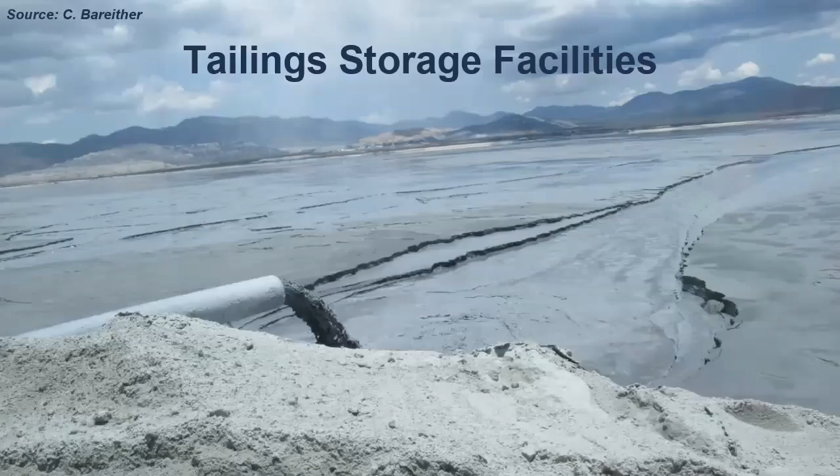As much of the water as can be is going to be recovered from a decant pond, and the mine will go on, right? And the problem with these facilities is that if they work, great, we don't worry about them. And if they don't work, we have tremendous problems. And so this figure that I like, that I've modified from Carlos Santamarina, shows a few of these examples of why we can have problems.

We can have overtopping of the dam if water is not correctly managed or balanced, or if the climate does not do what we expect it to do. We can have a geotechnical failure in the dam. What I'm showing here is what's called an upstream raise, which is the most efficient, the lowest cost, the lowest footprint, but also the least stable in many conditions.

Or we can have a foundational failure where foundation material either doesn't act as we expected it to, or there are pockets of material that are heterogeneous, that we didn't characterize the engineering properties at that location because things varied in space and we missed it, and where we get behavior that we didn't want. And the result can be videos of failures that get splashed across social media, right?

So has everyone seen this video? A few nos, so I'll go through the very beginning. So, right, this is a tailings dam failing under static liquefaction. Rock on the face. There's a truck and people working on that. Yep. Yeah. In real time.

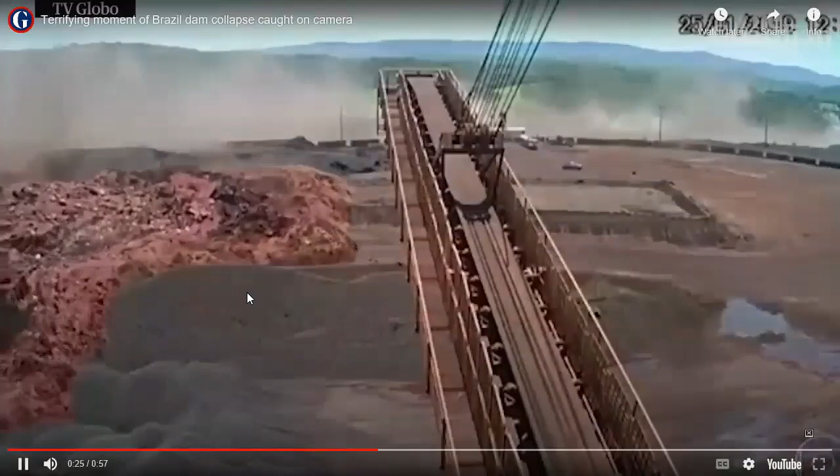And a little bit of a better sense of scale. This is a few years ago. Oh, maybe I'll jump to the end. How about this one from a few weeks ago? Right in South Africa.

So these failures continue to happen, right? And we're going to talk about that a little bit further. The result of this, as well as increased pressure on the mining industry to be more green, right? And to have different styles, perhaps, of interaction with communities, different engagement with communities, different engagement with the public, has been the global industry standard on tailings management that ICMM member companies have agreed to implement in some framework.

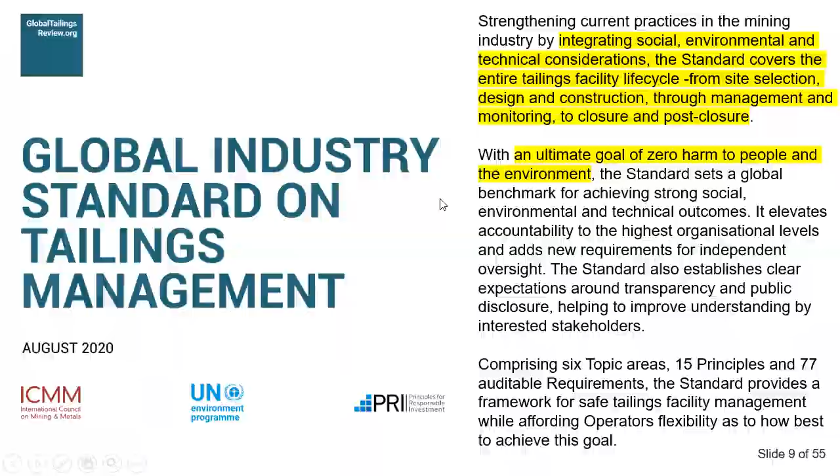The goal of this is to go from the very beginning of mine planning all the way to after the mine is done, after the tailings are covered, after a landform is reestablished. The other goal in here is to have zero harm for people and the environment. So the goal is zero harm. A question exists whether or not we can get there, but a huge focus in the tailings space right now is how do we get there? And part of that is investments, part of that is awareness, part of that is additional technologies.

So I'm going to talk today about two aspects of towards zero harm. One is going to be related to design and implementation, and partially related to activities going on at mines, where we need good engineers and we need communication between those that are designing or managing tailings and everyone else involved in the mine. And we need to be doing better at that than we have in the past.

The other piece is going to be briefly around technological innovation as an example of some research we've been doing at Colorado State with some industry partners. One example, there are many examples. And again, my goal in trying to cover both is to not totally bore you. So we're going to talk first about design and implementation and talk very briefly about static liquefaction, which is the attributing mechanism to a number of the recent failures. But it's not a new failure mechanism, right?

So if we go back, Priscilla was leading a short course earlier this last week, where we went through a case study on a tailings dam failure that occurred in South Africa in 1994. Now, 2 orders of magnitude smaller than Samarco. 2 orders of magnitude is a lot smaller, but these failures continue to happen. So we can't say we didn't know this possibility exists when it's been happening for decades. And it goes even further back.

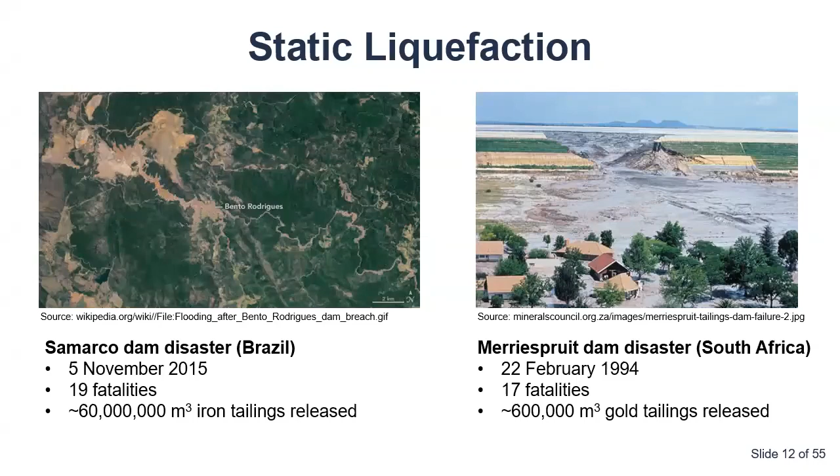If we go back to Montana, so I'm from Montana. I graduated from high school right around here. If you look at the largest reservoir in the state, the Fort Peck Reservoir, during the dam construction in 1938 it failed via static liquefaction and was identified to have failed as static liquefaction, although at that time the concept was new and very controversial. And so there was some good technical fighting in the geotechnical literature about what the cause was. But we've been aware that this exists for going on 80 years.

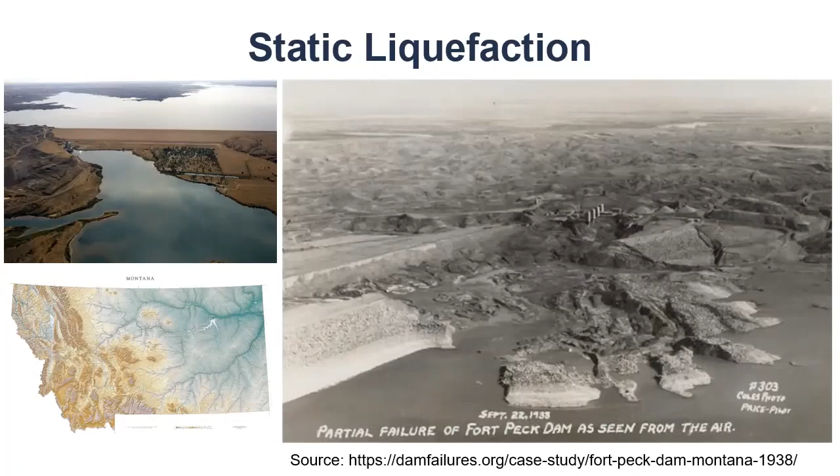Right? So why does it keep happening if we have awareness that things can fail this way and they will fail this way under certain sets of conditions? All of this comes back to effective stress. So I was teaching undergraduate soil mechanics for a colleague who was out of town earlier this week. I got to introduce effective stress, which is my favorite concept in geotechnical engineering, the seminal contribution of Karl Terzaghi to soil mechanics.

My dog is named after the engineer that first published this equation. My cat is named after his lab assistant. My wife would not let us name our son after him, but the dog had already been named. I think I lost that battle.

But who's familiar with effective stress? To varying degrees. So the concept here is that soils and tailings or any saturated material, the stress felt by the material is related to 2 components. It's related to the total stress applied and to the pore water pressure. So the total stress is just the composite normal stress on a plane. It's a combination of the soil stress, any loads at the ground surface, and the weight of the water.

One way to think about it would be if you took any plane in the subsurface and just took that column of material out perfectly and stuck it on a balance and weighed it, and then divided that by the area, you would have the total stress that was acting on that plane. And it gets a little bit more complex if we're looking at different orientations in the subsurface, et cetera, but a pretty basic stress. The pore water pressure is exactly what it sounds like. It's the water pressure in the pores.

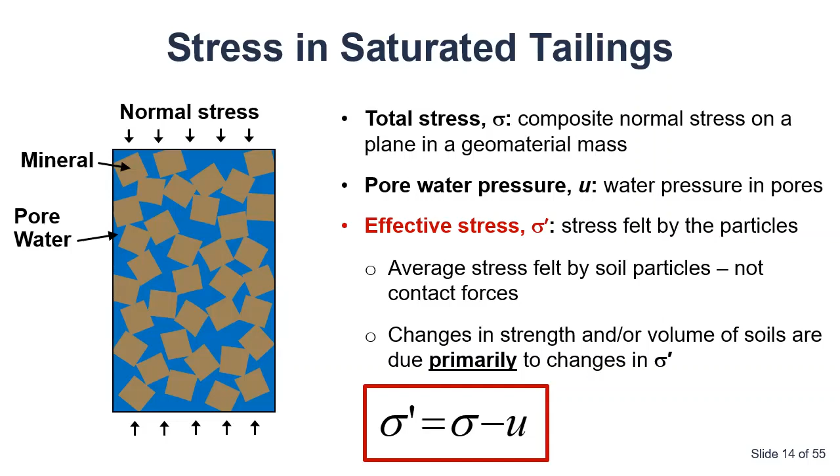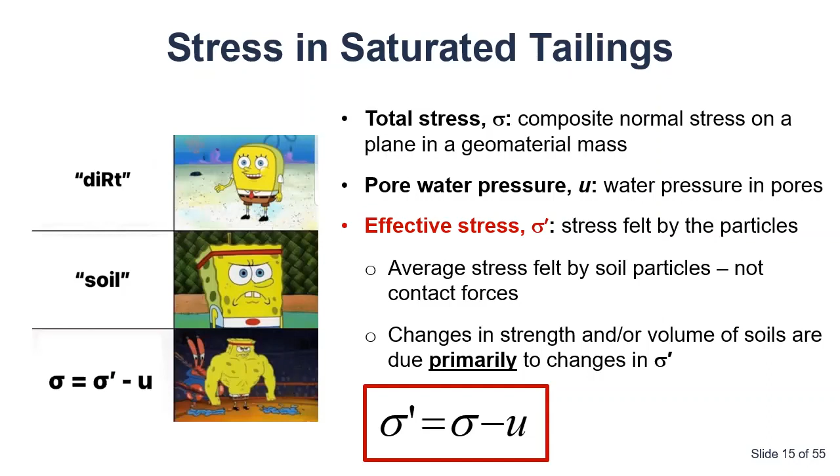It's certainly more complex, but this is a very fundamental concept in geotechnical engineering. At the end of the semester, I make my students make memes to describe the class. I often get a third of those just related to effective stress and the importance of effective stress in geotechnical engineering. And effective stress is our tailings challenge. But we've known about this and we teach it to undergrads. So why do these fail?

Part of the answer is in this upstream construction. If we don't know what exactly was placed here because we didn't communicate it, because we weren't paying attention in the past, because somebody was having a bad Friday and didn't document the deposition or the location of the slimes of the pool next to the dam on that Friday, over the 20-year period that this dam was constructed, and then later on construction happens above it, we can run into problems.

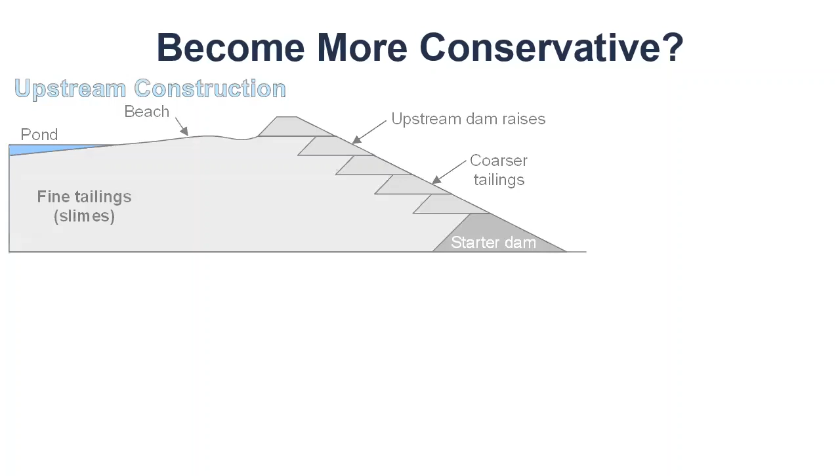So one solution to dealing with this then is we become more conservative and we no longer build on top of those potentially weak materials. We build straight up, or we build downstream even to get things even stronger. The problem here is it requires more material to actually build the dam, and it takes up a larger footprint in locations where often we're space limited.

So we've got challenges. Characterizing these old facilities and figuring out where those weak spots are is a challenge. We can do it. It just takes a lot of effort. But to the point earlier on the video, there was a drill rig out at the toe of that dam when it failed. So there's a lot of these facilities and there's a lot of haste needed to get these characterized to make sure that we're not going to run into more problems.

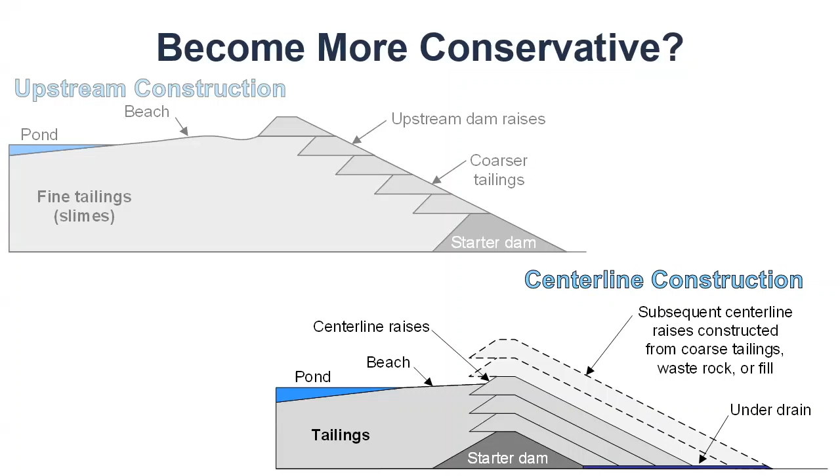Yes. But it's also predicated on maintenance and water management practices. Yep. Both of which were grossly inadequate, and are likely inadequate at a number of facilities of the at least 17,000 that exist across the globe. There's estimates of these number of facilities up to 34 and even 40,000 tailings facilities worldwide. It's hard to actually get estimates.

This is from a student's work a few years ago, and you see there's plenty of countries where we know mining is happening that the estimate is zero because there's not reports on the number of tailings facilities. There's also countries where we have good databases as to the number of facilities that are in operation. The result of this, though, is you've got big complex facilities with sometimes unknown history, and there's a lot of work to be done to assess whether or not all of these are stable given our current set of knowledge and that we're not going to continue to have problems.

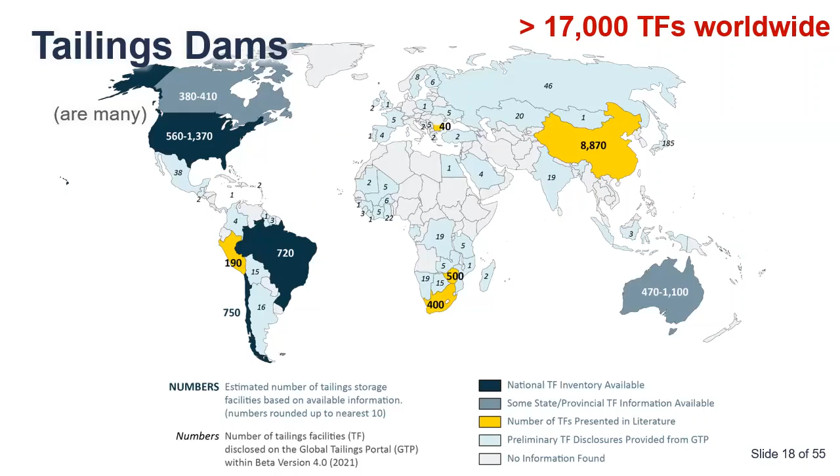All while we're trying to ideally mine more with lower grade ores. And so we're going to have more projects coming online simultaneous to assessing existing facilities. So part of the Towards Zero Harm is just having good engineers that are out there assessing this. This good engineer would also come into those ethical questions and whether or not we have governance in place that is able to frame those ethical questions and impact some of those ethical decisions, but also that companies are buying into that and realizing that there's a huge risk at play here and that some of those schemes that are either ethically questionable or unethical really are not acceptable and really need to not be at play.

So one of the issues in play, and certainly a fun one to talk to at a university, is that we need more tailings engineers. We also need more mining engineers. And so we don't just have one problem here, but especially with these recent failures, especially with increasing size of facilities, and especially with the GISTM and all of the assessment that has to be done as part of that, we have a large need for more skilled folks to work on this.

The other problem, and I actually don't know if this exists in the mining industry, it exists in other portions of civil engineering, we have a lot of baby boomers with a ton of knowledge. We have a big drop off after the baby boomer generation. And because of that, we need a lot of people, but it's not just like the university is magically producing competent, fully trained 20-year of experience engineers. It's going to be a long journey to get there.

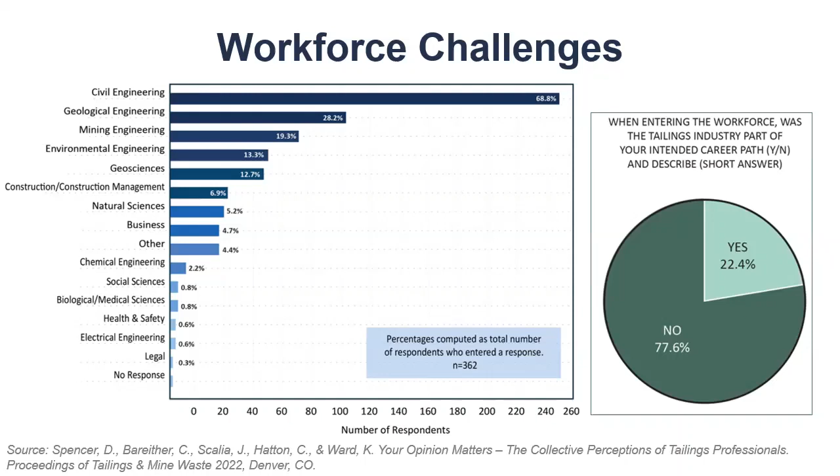And I would argue increasingly, the huge piece of this needs to be communication among all these, and especially communication with the mining engineers, because a lot of the decisions that the mining engineers, that the metallurgists are making are impacting the tailings, are going to be impacting the tailings, have impacted the tailings. And so those communication lines need to be much more open and more developed than maybe they have been in the past.

We asked those practitioners, what is the greatest challenge facing the tailings and mine waste industry? Their opinion was the biggest challenge is labor. And primarily, these were short answers. That labor is having good people, getting good people, retaining good people. Management in general, social license, design safety, mining industry practices, probably all things that if you asked anyone in mining, you would get similar responses.

So what are we doing about this if we know there's a labor problem? CSU has been working on tailings and mine waste work since decades ago. Started the Uranium Mill Tailings Conference with John Nelson and Steve Abt and others in 1978. That conference is still going on. It'll be hosted in 9 days in Denver. We've got 650 registrants. It's sold out. We've maxed out the venue.

So there's activity here. The horrifying thing, we have 650 registrants. Of them, 30 are students. And there's about 10 to 15 academics. So that partially reflects that we've got a conversation that happens among industry. It's also a reflection that we need to be doing a lot more in recruiting and students. We need to be a lot broader.

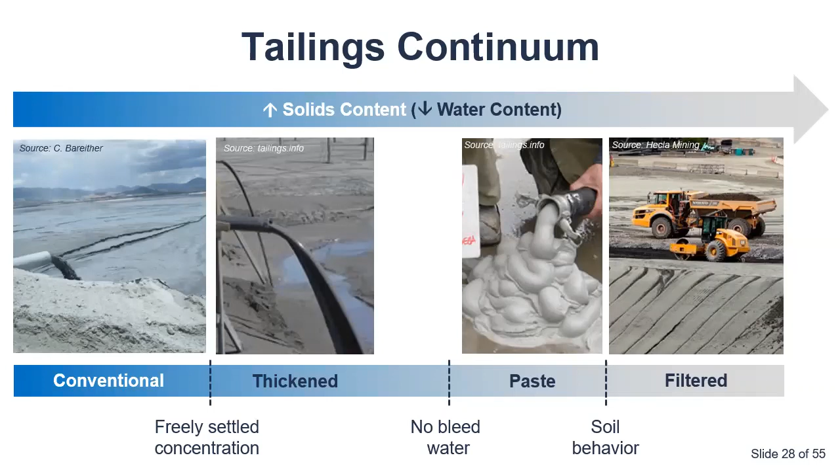And to the right on the spectrum is filter tailings or filter cake, where we've gotten the material to be unsaturated. We have something that's acting much more like soil in theory, and less like the muck on the bottom of the pond that you punch through immediately when you step on, right? That's all that we're doing in these classical tailings storage facilities. We're just trying to get the water out. Instead of waiting for gravity to do it and waiting decades, centuries, millennia for all the water to get out, we're doing it in the course of a few hours by inputting a lot of energy.

So how do we filter tailings? I mean, the concept is very basic. We're going to somehow get the water out of that material. We can do that either using hydraulic means, so we can apply suction and pull the water out of the tailings, or we can do it via physical pressure means, where we're going to squeeze the tailings between some filter screens and squeeze the water out of the material. Both of these, depending on how fine your tailings are, can be more or less difficult. You can imagine getting water out of sandy tailings with no clay is pretty easy.

If we have a lot of clay, if we have a lot of smectite clay minerals, for example, it is darn near impossible. And there's innovation being had here. There's improvements being had here. These filters are getting larger and larger. Currently, the biggest mine operating using filters is operating at about 35,000 tons per day. There are many mines that are substantially larger, an order of magnitude larger. And so this technology needs to advance in terms of the scale.

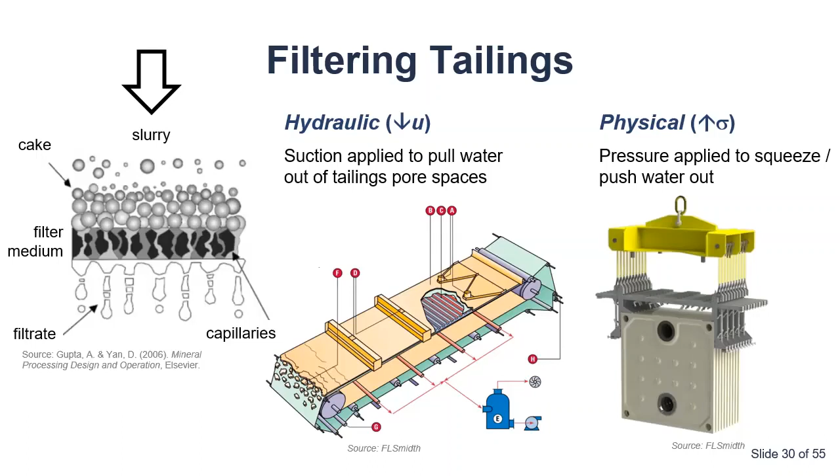It also needs to advance in terms of other issues related to, what happens when you have a particularly productive day? What happens when you have a particularly wet week and you're not able to just place this as you expected? Lots of design needs to go into this.

The other big piece, who's made coffee before with an AeroPress? Right, so the concept here is you grind your coffee, you put it into this little press, you stir it around. There's a filter here at the bottom, a little piece of filter paper or a wire screen. You take a plunger and you squeeze the water through the coffee, separating out the coffee grounds. You have a little bit more pressure and a little bit more aeration, so this gets you a little bit closer to something analogous to an espresso. If you've done this before, the problem is the smaller the grind, the harder it is to get the water out, the more energy it takes.

I had the horrible idea when my daughter was little, she would help me push this every morning, which was really entertaining when she was like 2. And it's less entertaining now that she's almost 6 and she loves the smell of coffee, and every time just asks, can I have that?

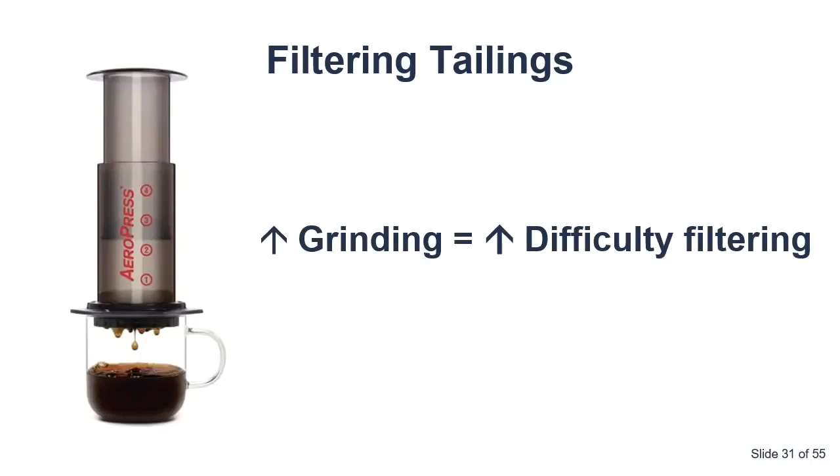But I had to be careful of how fine I ground my coffee because she could not press this plunger if I ground it too fine. The same is true with tailings. And so part of the conversation that needs to be had is that decisions made related to extraction, related to grinding, very directly impact the amount of energy and the resultant tailings that are going to be formed. And so we need to be having those conversations because there's real dollar values.

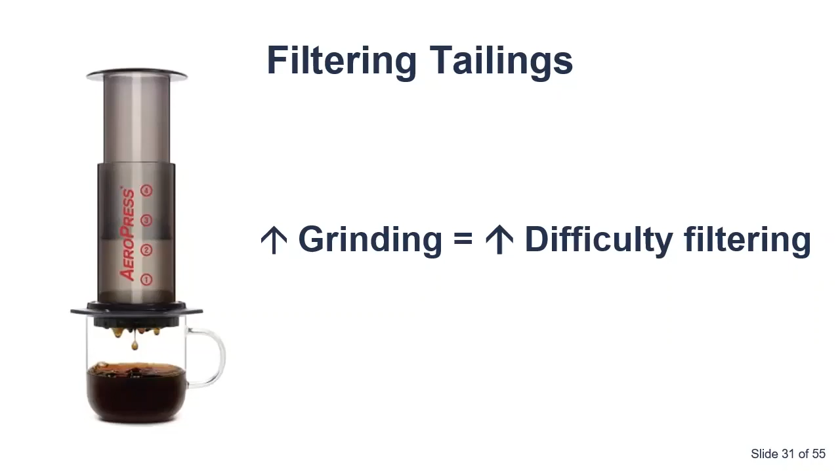You can imagine 35,000 tons per day of material that's 75% water. Squeezing that out takes a lot of energy, a lot of cost. But if you can get it, you end up with what's still thought of in the tailings space as the best available technology, which is you have these stacks, sometimes called dry stacks. They're absolutely not dry. Don't call them that.

They're filtered tailings stacks. The water content is pretty close to saturation, at least initially, because the more water you take out, the more expensive it becomes. The thought here is by having a material that is dense from the get-go, you have something that is stable.

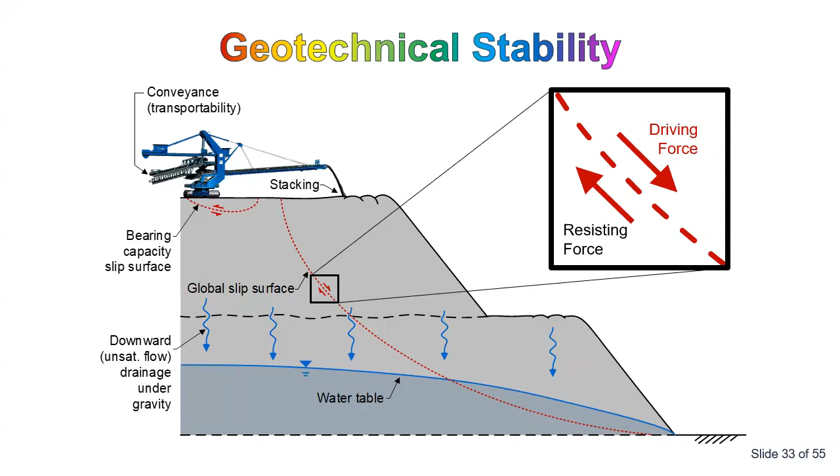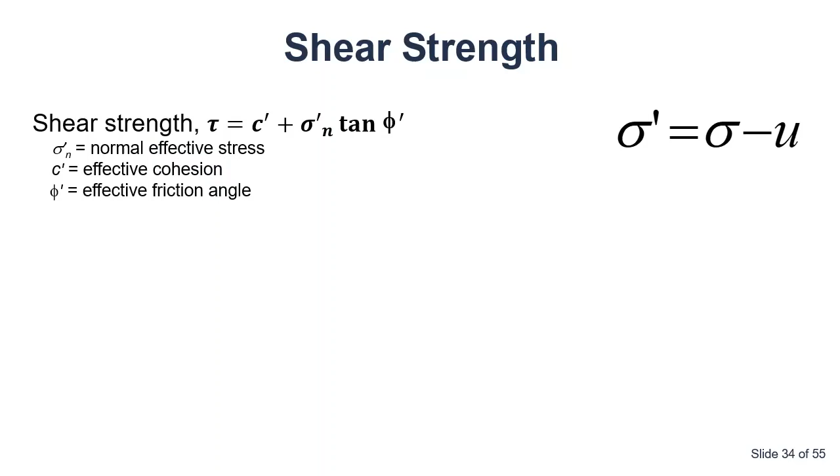And so our goal is to achieve geotechnical stability from the very beginning and not rely on a dam. And so diving back just to kind of basic shear strength, we think of our shear strength of our material as being equal to cohesion. Let's assume for a minute that we have cohesionless material, often the case for tailings. So we just have the normal stress times the tangent of the friction angle of that material. We can get a material that is stronger by placing it denser.

And a big piece of the reason for that is if we have loose particles, initially, I'll use my knuckle

example because I have to use this in every geotechnical lecture. I actually signed that in my contract when I started.

If I have loose material and it shears, the particles want to squeeze together before they move. That compresses the water in the pores. I get a positive pore water pressure. Effective stress equals total stress minus pore water pressure. A bigger pore water pressure, the material becomes lower shear strength. If I have lower shear strength, it's more likely to fail. So what I don't want is loose material.

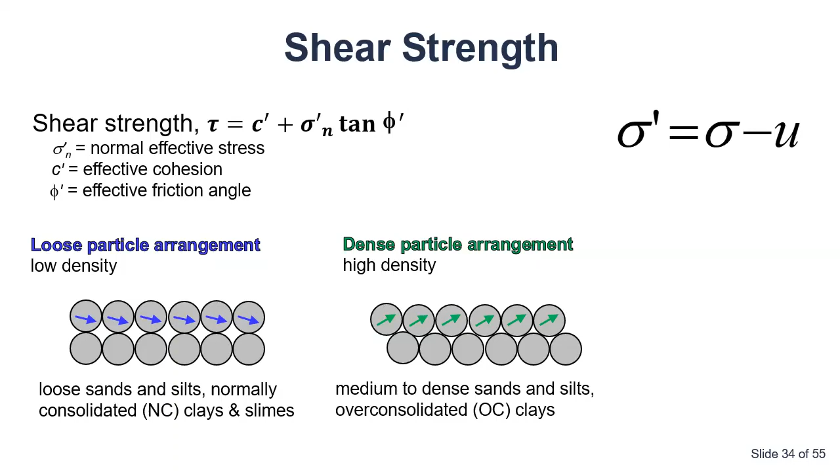What I want is dense material where when I shear it, again, to my knuckle analogy, the particles have to move up and over each other. The water gets pulled, it resists that. I have a negative pore water pressure. Effective stress equals total stress minus negative pore water pressure. The effective stress gets higher. So what I ultimately want is a material that is denser. And if I have filtered tailings that I can place and potentially compact, I can start out with a dense material. So I can start out with a stable material.

It is a little bit more complex than that. So we've been having students look at the unsaturated characteristics of these filtered tailings. If a material is more than 80% saturated, so this is a graph of excess pore water pressure during loading versus degree of saturation. As long as my material is less than 80% saturated, I've got enough air that I'm not going to generate positive or negative pore water pressure because the volume will change and that volume change will be accommodated by air. The air will just shoot out of the pores and all is well and good.

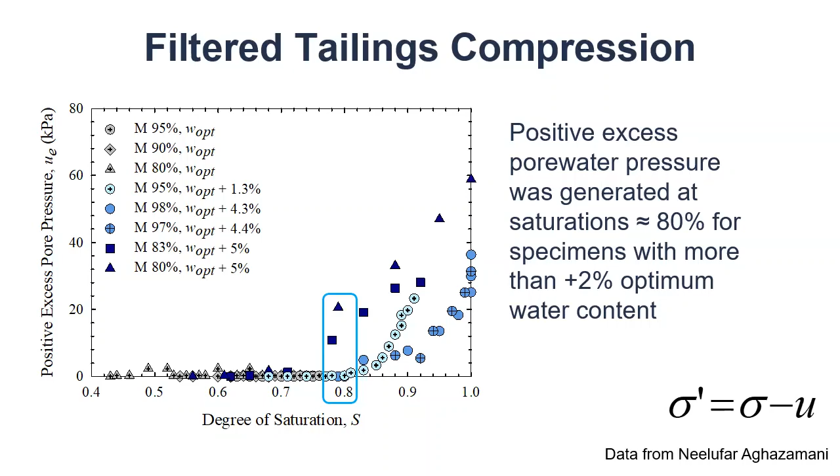Once I get to 80% saturation, the air phase becomes discontinuous and all of a sudden I can start generating pore water pressure. So I can't just place this material at 99% saturated and assume I'm going to be good. I need to be a little bit more careful. And we've gone a bit more into the weeds. I don't want to spend too much time to go into the intricacies on this.

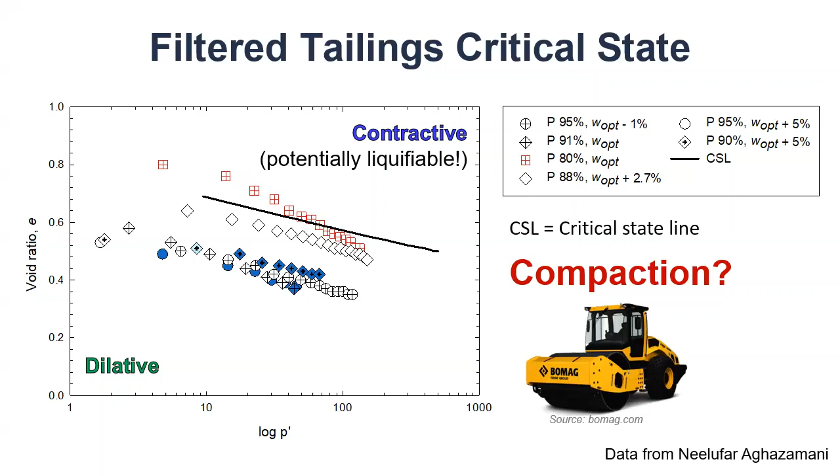And what we found is you can exist above this line on filtered tailings if you place the material really, really loose. And so there's not just a magic remedy here that we filter it, we place it, we're done and we're good. There's still design that needs to go into this and care that needs to be placed in the moisture content and the densities during placement. So we need to place it dense.

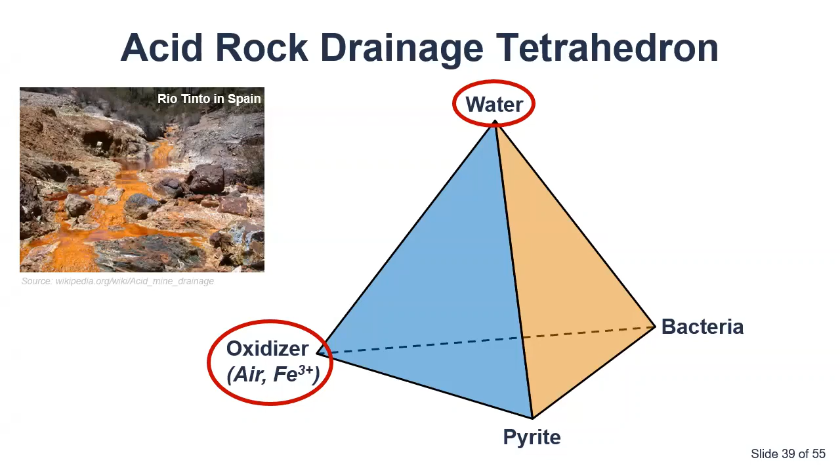Some of you may be thinking, oh, we have other examples of where we place unsaturated mine waste. We have problems there too. Maybe less so on the strength side, but we have problems with waste rock on the environmental side. And so we also in filtered tailings need to consider that we have a reactive material that could, depending on what the composition is, end up with a condition where we have air, where we have water flowing, and we end up with acid rock drainage. And so we've been looking at that as well.

But we're trying to avoid this characteristic orange ARD signature, and especially try to avoid it in a technology that we think of as the best maybe geotechnically, potentially a pitfall that we don't want to go down on the

geochemistry. So another research question that we've been looking at is if we can take our waste rock, co-dispose it with our filtered tailings, if the filtered tailings will either stay sufficiently wet or have a low enough permeability to either impede gas flow or impede water movement, can we just solve both problems at the same time? We're adding rock, we have something stronger, we're relying on the unsaturated characteristics or the saturated characteristics of the tailings.

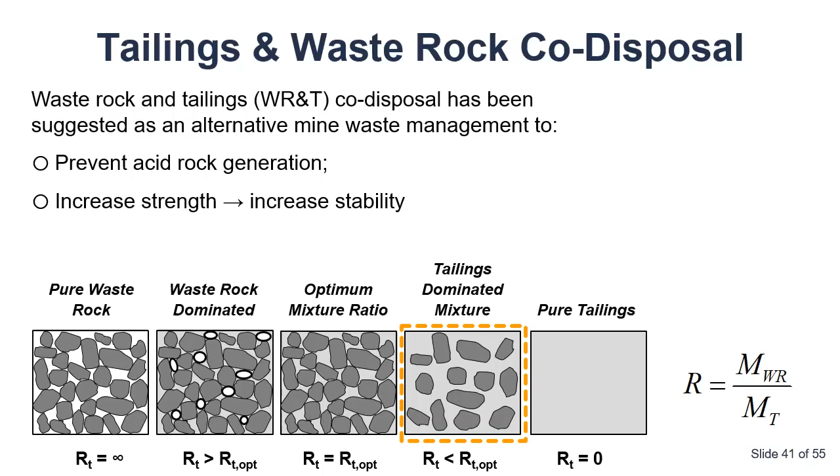And so we've been focused a lot on these tailings dominated mixtures where we've got like raisins floating in oatmeal, the raisins being waste rock, the oatmeal being the filtered tailings. Looking at, does that end up with a superior material?

Again, with the concept being the low hydraulic conductivity of the filtered tailings reduces flow, reduces the potential flux of acid drainage. The soil water retention can potentially hold the water content high enough that we have a delicate balance of a discontinuous air phase to impede oxygen ingress, to impede one corner of that acid rock tetrahedron, and that we also gain shear strength by including rock in this material, and so we can end up with something even stronger.

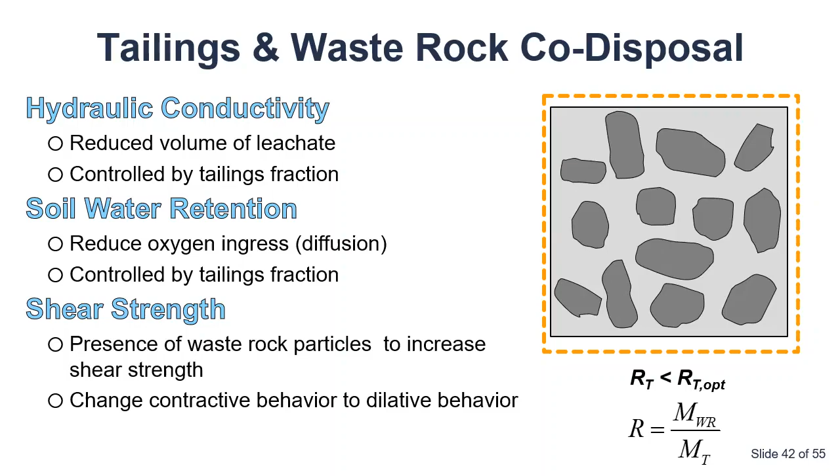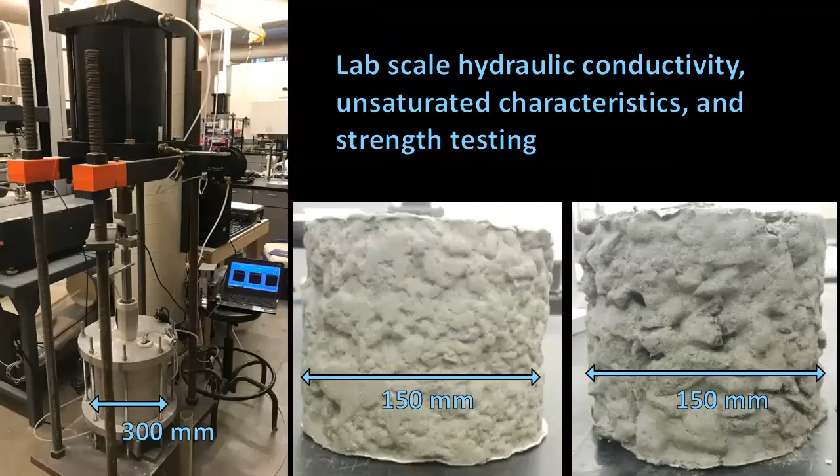We've been looking at this for a number of years at the lab scale, at different lab scales. Some examples of what that looked like. These are from flexible wall permeability tests. You see those rocks just encapsulated within filtered tailings. We've been looking at this at the field scale because the field scale, we know, especially soils, especially tailings, can behave very differently in the field than they do in the lab.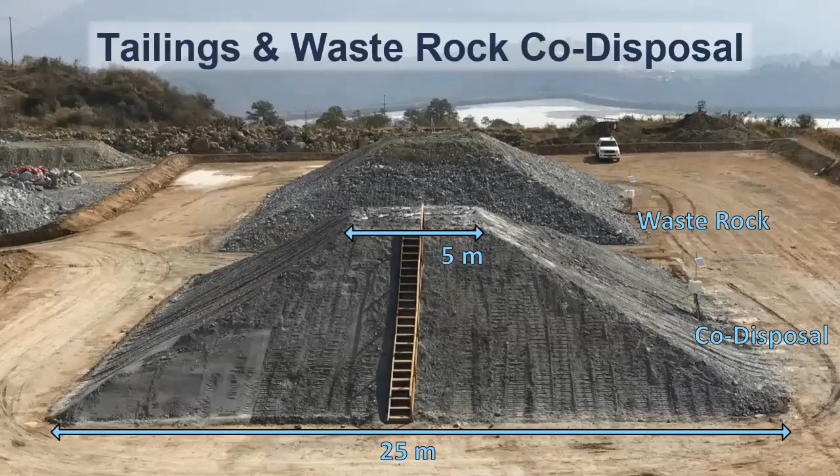This is an experiment that was conducted in Central America. We've got one pile that is waste rock and tailings blended together. We've got one pile that's just waste rock, and we wanted to look at, did this actually prevent acid rock drainage? These ran for 2 years. We went back. We also characterized how the engineering properties had changed.

If you've ever wondered how do you characterize the hydraulic conductivity of a soil in a way that we trust we've captured the macroscopic flow features. So if I run an itty bitty test, I may miss that there's a crack right here that's a superhighway for flow. And the best practice for doing that is what's called a sealed double ring infiltrometer, where we run just a really big hydraulic conductivity test in the field.

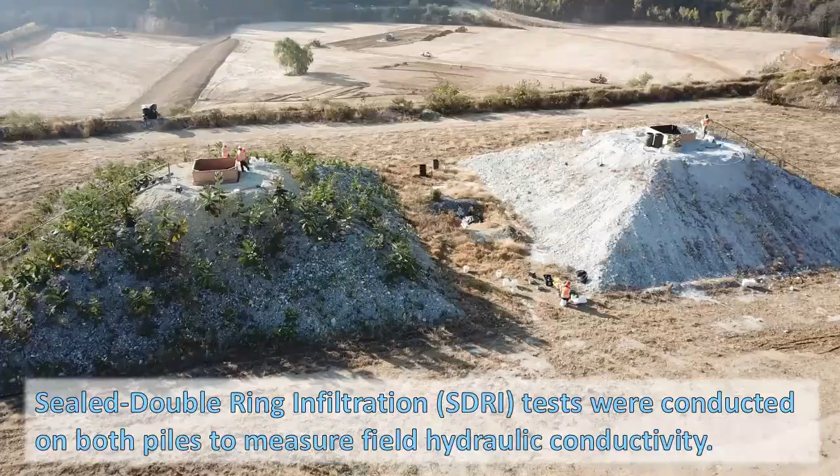Sealed double ring meaning we have an inner ring. We monitor how much water flows vertically down from this inner ring. We have an outer ring that creates a flow halo, and we quantify the flow versus time. Calculating the gradients gets a wee bit tricky, but we're able to measure the saturated hydraulic conductivity of the material.

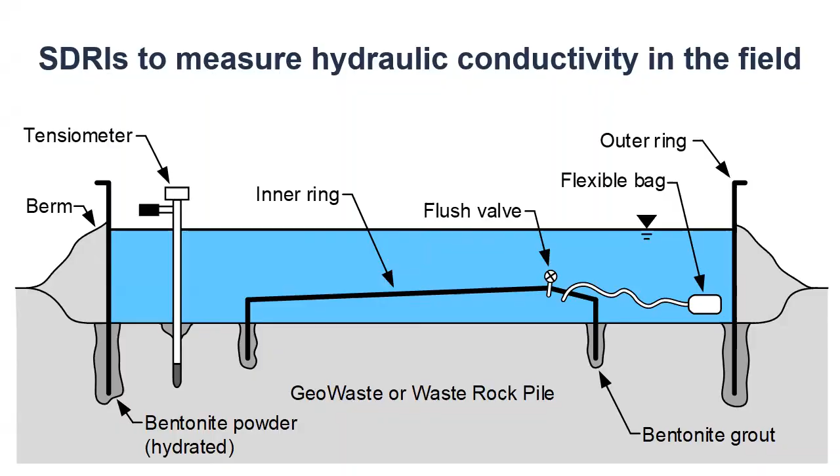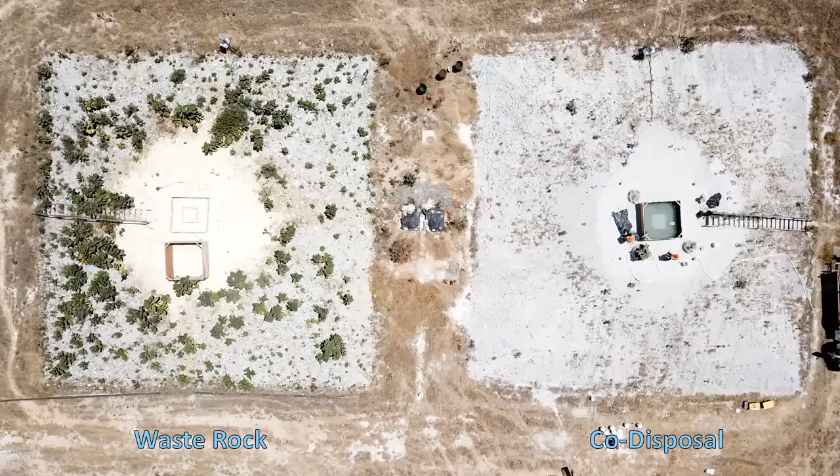We did this at the site. Drones are great for getting good field photos. A photo of the drone looking down at the 2 SDRIs in operation. These tests take about 2 weeks of continuous flow. Continuous flow on top of this stack was a little bit extra tricky, but made for a fun project.

And then given time jumping ahead, using 2 years of sensor data from those piles, instrumentation of pH, instrumentation of seepage, instrumentation of oxygen and water content, looking at lab data from literally hundreds of saturated and unsaturated tests, looking at unsaturated flow modeling, we're able to try to distill out some practical implications for these.

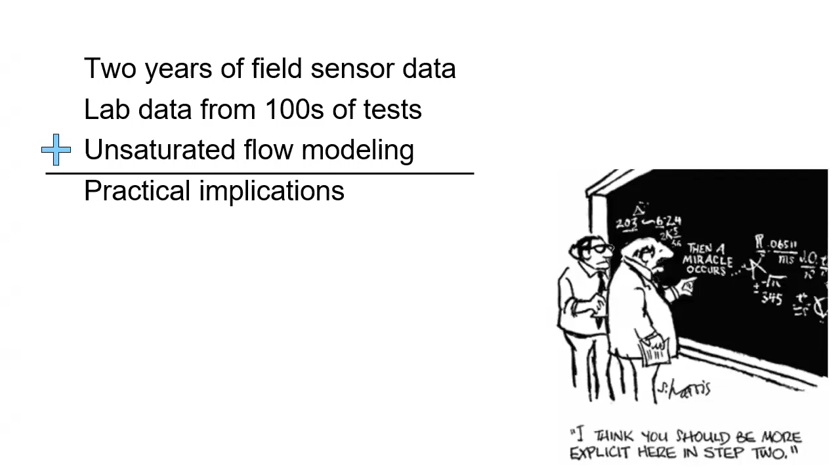So very briefly, if you put these in a dry climate, they dry out, which is maybe not the most exciting outcome from literally thousands of hours of lab work and analysis. So in an arid climate, your evaporation dominates your precipitation. Even though these go in a little bit wet, you have a big boundary condition that is removing water at

the surface. And the outcome is, after some initial drain down of water that was saturated to begin with, so no gas in place, the thing stays dry and you don't get downward percolation of water because your tailings are basically functioning as a water balance.

This is the same thing that we do in landfill covers now, or in uranium mill tailings covers or hazardous waste covers. We rely on the natural water balance in arid climates to minimize our percolation, to minimize potential environmental impacts. And so we can get that behavior with filtered tailings, and we can get that with co-disposed filtered tailings and waste rock, which is pretty cool.

In a wet climate, the geotechnical stability gets a bit trickier because we need to make sure we're placing things dense enough, because once we keep adding water, it is going to get saturated given the low hydraulic conductivity of that material. But again, if the whole pile stays saturated or near saturated, we don't have oxygen ingress, we don't have runaway acid generation in our tailings. And so we're able to achieve a very favorable geochemical condition in wet climates.

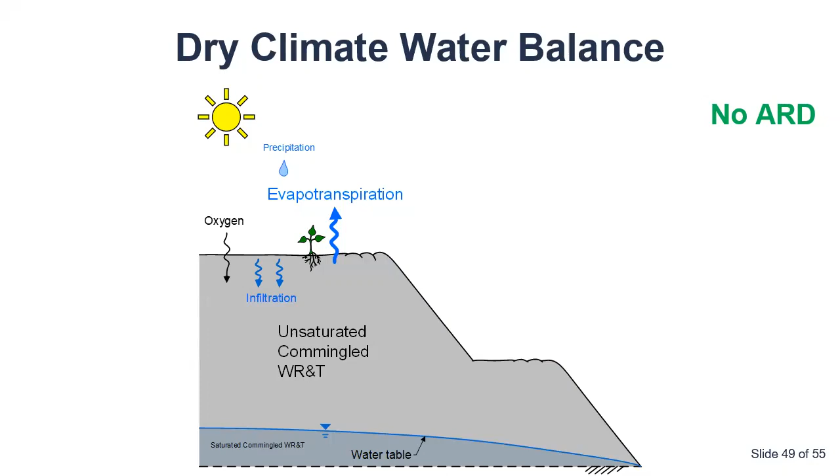In the wet climate, that water balance isn't going to do it, right? But we may want the material to stay saturated or near saturated. We can add resistive covers, so covers that are intended to zero the downward percolation of water, if that's relevant for our objectives. That might be something like a geomembrane that's just a sheet of plastic that is resisting flow. It can be a mineral barrier, like a thin layer of sodium bentonite that's sandwiched in there. It can just be soil that's been compacted.

But all of those systems, they're integrating with the atmosphere as well. And so in a climate where we get groundwater recharge, where we have an abundance of precipitation and not a lot of evapotranspiration, we're always going to get downward percolation of water through soils. That's what nature wants to do. So we either have to accept that we're creating something that is permeable, or we rely on saturated conditions existing. And then we really get into how do we direct the water so that the whole thing isn't being leached continuously, so that we have preferential flow paths directing water out of the system as we intend. And then erosion, as always on the cover problem.

So where this potentially gets much trickier is in these climates where we're between really dry and really wet. The Front Range of Colorado would probably fall in that arid climate, but maybe Boulder wouldn't. But there are plenty of places in the world, where I grew up in Montana would be one example, where we have a climate where we get a little bit of percolation, but it's episodic. It depends on whether or not we had a good water year or a bad water year.

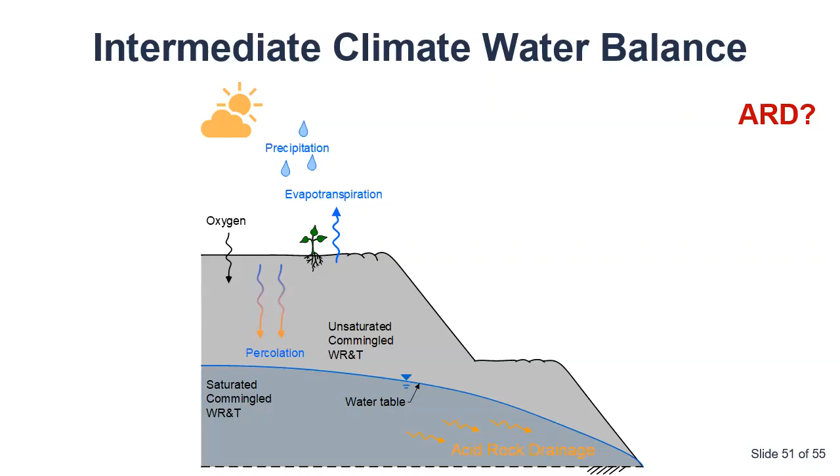So maybe rounding out filtered tailings, the big elephant in the room on filtered tailings is still cost, right? The amount of energy required to remove water out of these systems. I remember at Mine Exchange in Salt Lake talking to one of the filtered vendors this past year and them bragging about their filter press applying the force of the space shuttle launching, which is amazing until you think about the energy that's required for that to happen, right? So we need to get the cost down.

We need to also figure out how we're calculating costs. If we're using net present value and high discount rates, we're going to end up with things that are unrealistic. We're up to 35,000 tons per day. We don't have a big, large scale demonstration of this technology, and then energy and carbon. In the long term, then it's just seeing these get bigger and bigger.

Figuring out the fines issue. If you have a lot of fines, they're really hard to filter. So if we grind less, we recover less, but we also have an easier time filtering. And so what does that balance look like? What does that balance look like on a case-by-case basis?

And then increasingly a driver on this is water, right? If we're in environments like Arizona, where we have water scarcity, where the federal government is asking us to cut water usage, having a huge evaporation pond sitting there for the next 200 years may not cut it in the future. And so getting the water out now, water is increasingly being viewed and valued in these kind of analyses.

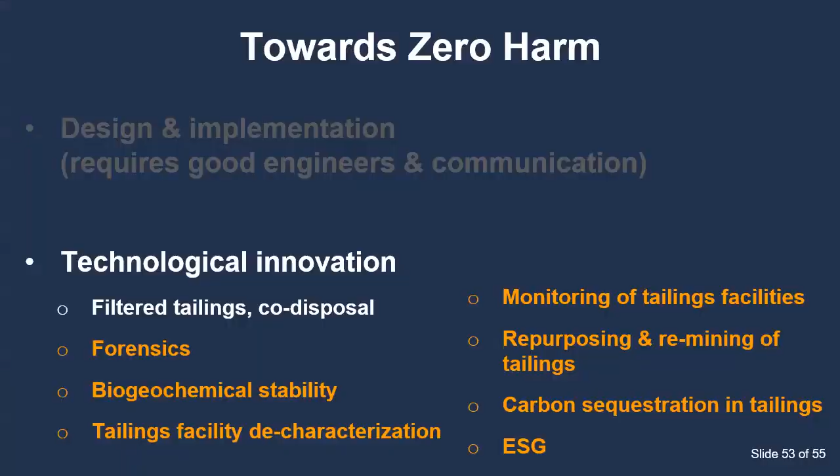You have a completely saturated stack, but rainwater is still flushing through. That rainwater is going to carry on. So is it still causing mass erosion? Yeah. So in this type of stack configuration, yes, you're still getting percolation. Ideally, you're putting a cover on and minimizing the flux of that. But where we benefit in filtered tailings, the particle size distribution is so fine that the saturated hydraulic conductivities are very, very low. And so the rate of flow through these facilities is tiny.

So are you still getting some acid rock drainage proceeding? Yes. How far is it getting into the stack? What does the geochemistry look like? What does the buffering look like? What does the microbial ecology look like within that large stack under those conditions? Great question. And at some point, we probably need to take apart Greens Creek to figure out what's actually happening there in terms of these processes. Because there's a lot of seepage going on. Yep.

So I have a comment slash question. Since water is becoming more valuable and the main problem in tailings is this water, why don't we also encourage research for dry processing? Yeah, absolutely. If that could get figured out, we have solved a large component of the problem. It doesn't take away all our previous facilities, and it's got to become competitive with existing processes, but certainly there are many more paths here. Why don't we recover a lot of these metals off the earth and bring them back? As y'all know far better. Then we're not even dealing with terrestrial tailings.